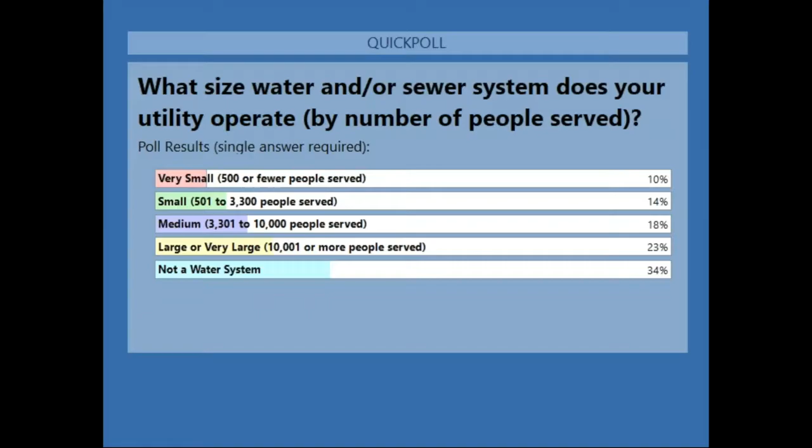James, are you with us? I am with you. My screen should be up. Yeah, looks like we're good to go.

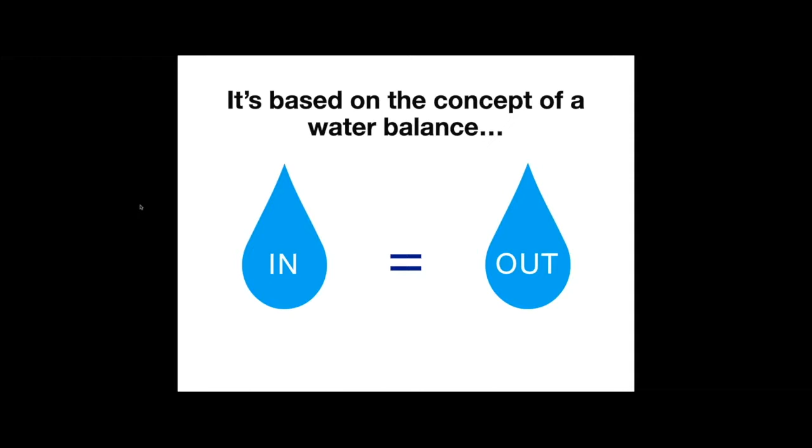And then what the water audit and the software that we use to do that audit help us do is to essentially estimate or calculate the quantities that are going into the system and the quantities that are coming out of the system. And if we subtract the out from the in, that leaves us with a volume of real loss. This is the water that's essentially leaking out of our pipes. This is a slight simplification, but this is basically how it works.

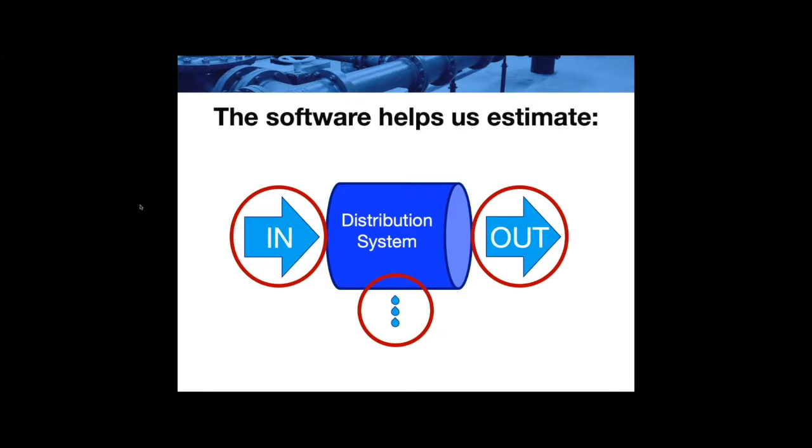And it's really important to recognize that the accuracy of a water audit really depends on the accuracy of the data that goes into it. As with any mathematical model, if you put garbage in, you get garbage out. And one of the quirks of the water audit software is that if you overestimate inputs, those overestimations show up in the audit as real loss. Similarly, if you underestimate inputs, they reduce the real loss number. Sometimes this is really obvious because you end up with a result with negative water loss, which is physically impossible.

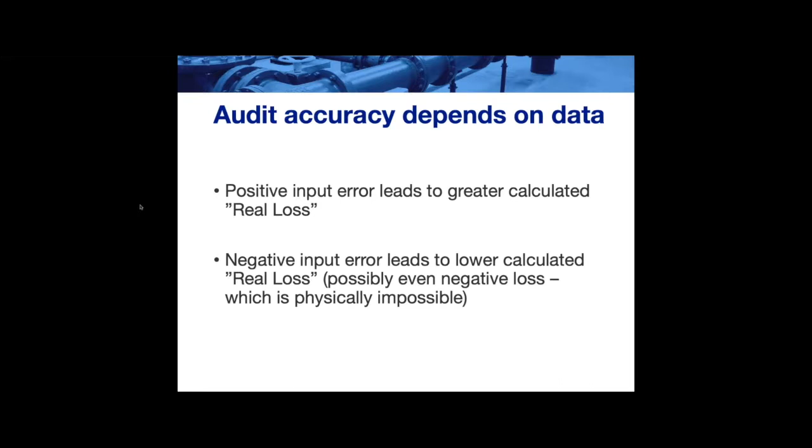But it's important to recognize that this is sort of a top-down set of calculations that then needs to be verified with a bottom-up component analysis, which we'll talk about a little bit later on. It's important when you are looking at your data to realize the water audit has summary data as input. So all of the water that you put into your system, all of the water that you sell to your customers, you really need to review your data and look at the data sources and how those summary numbers are calculated to make sure you know what's actually going into your water audit.

As our old president, Ronnie Reagan, used to say when he was talking about nuclear disarmament, trust but verify. This is basically the way I treat summary data, and I think it's a very good idea. Trust the numbers that you're getting, but make sure you understand where they come from, particularly when you're doing estimated volumes for things that you don't have metered, and make sure you keep good records of how you came up with those values.

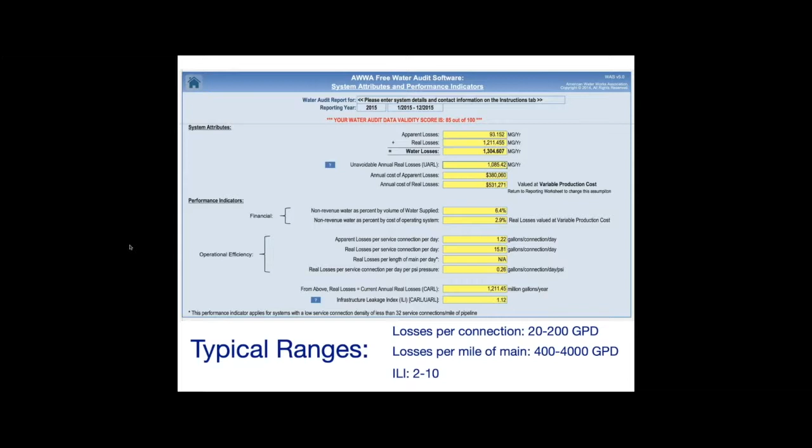It's important when you're doing your water auditing to have a sense of reality about it. And for those of you who are online who are maybe new to water auditing or new to the water world in general, you are never going to have zero water loss. It's just not realistic. All systems leak to some extent, and it's really a question of keeping that leakage to an economically reasonable amount.

If you do end up with a water audit that says you have zero leakage, there's a very good chance that your data is incorrect. But even that is a win because it lets you know that there are points in your data acquisition and collection and storage and analysis that need to be improved.

One of the big things that comes out of the audit is this CARL, your current annual real loss. This is a lump sum value of what's leaking out of your system, essentially. It contains a component of technically unrecoverable losses, and I say that they're unrecoverable because through typical means of finding leaks, these are leaks that will not show up. This is background loss that you can't hear using an acoustic mic, things like that.

There is some amount of loss that you could recover, but it's not really economically efficient to do so. As with most things, there are laws of diminishing returns with regard to reducing water losses, and after a certain point, reducing the loss becomes more expensive than the value of the loss you're getting. And then there's obviously some economically recoverable amount of loss that you can attack. And the audit processes and the processes that you engage after doing an audit help you look at these.

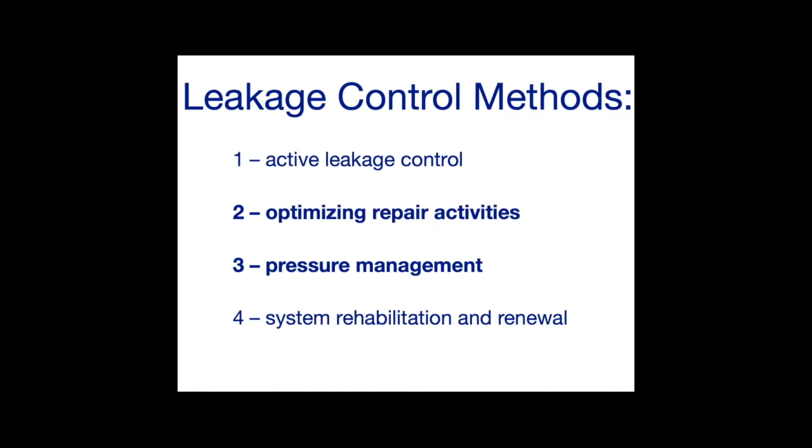But as I said, it's really important to identify what your problem is before you start applying tools. There's no silver bullet. You need to have an ample toolbox of leakage tools and know when to use them and how to use them. As my dad used to say, when all you've got is a hammer, everything looks like nails.

And as a perfect example of this, I know of a system here in New Mexico that had about a decade or so old PVC system, and based on some back of the envelope calculations and anecdotal evidence, thought that they had a leakage problem, and the one tool that they knew about was leak detection. So they spent $10,000 on a leak detection program that didn't really find any significant leaks.

And then they didn't believe the results, and they did it again. That's an example of applying the wrong tool. Their real issue was meter calibration and their data inputs.

So in general, water audits help you identify what's going on in your system. They help you evaluate whether you have a non-revenue problem and whether that problem is due to real water loss, leakage from your system, or apparent loss, essentially water going to customers that you aren't getting paid for but should be, or, as is usually the case, a combination of the two.

It provides us a bunch of metrics and gives us information about costing those. But one of the things that it doesn't really do is categorize those losses. It gives you a lump sum, and it's not going to tell you whether your losses are from breaks, background losses, or tank overflows. That requires further investigation, but the audit is step one.

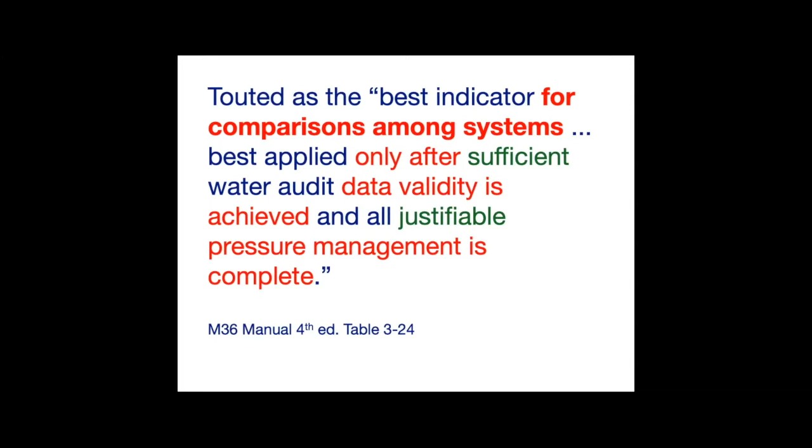And it's a way of sort of benchmarking performance, doing an apples to apples comparison. So, quick review again, ILI, it's your current annual real loss over your unavoidable annual real loss. And I have a little bit of a problem with that name because it implies a level of certainty that I don't think is really there. But it comes out as a dimensionless number because the top one is gallons, the bottom is gallons. And it's calculated using some very basic parameters from the utility.

A lot of folks, when they're talking about this, sort of think of 1 as the magic number, that if you've got an ILI of 1 or close to 1, that you're perfect. An ILI of 1 is not typical. That being said, I've looked at several thousand water audits from around the country, and about 18% of those have ILIs that are actually below 1. Now, a large percentage of those are because of bad data, but some of them are actually legit, which sort of begs the question, if the value I'm calculating is unavoidable loss and my actual current loss is less than that, is that unavoidable annual real loss number accurate? And then we'll dig into that here in a second.

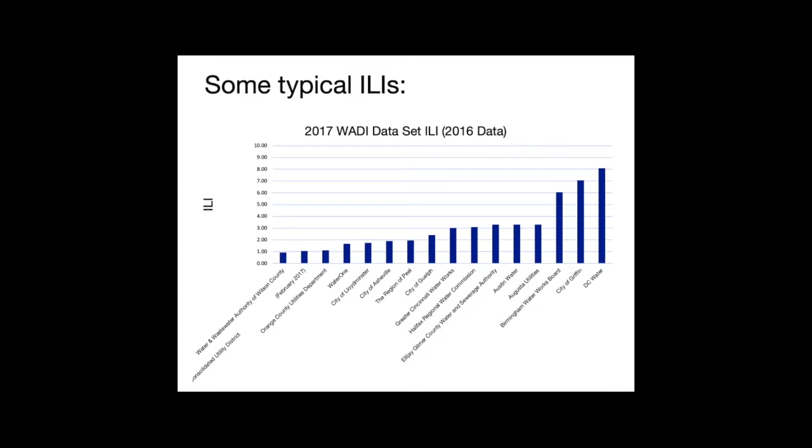Just for reference, a typical range of ILIs, somewhere around 1 to up around 8. These particular utilities are taken from the 2017 WADI data set. This is an AWWA initiative to collect validated water audit data over a number of years. And you can see we've kind of got a wide range here, and these systems are of wide-ranging sizes. So we've got this ratio, but to see whether it is actually applicable, we really kind of need to look under the hood a little bit and understand how these are calculated and where they come from, and some of the uncertainties that are involved with these numbers.

So the CARL, the current annual real loss, that's a figure calculated by your audit based on the values that you give it, all of the inputs, all of the outputs, and then some assumptions about things like theft if you don't have your own records. It's really important to remember that small metering errors can lead to large margins of non-revenue water and show up as real loss or lack thereof. And sometimes it's a little hard to tell how far off you are. And it's important to also recognize that the CARL doesn't categorize your losses. We talked about this at the beginning. It gives you a lump sum. It doesn't tell you whether your problem is background leakage or tank overflows or a combination of the two.

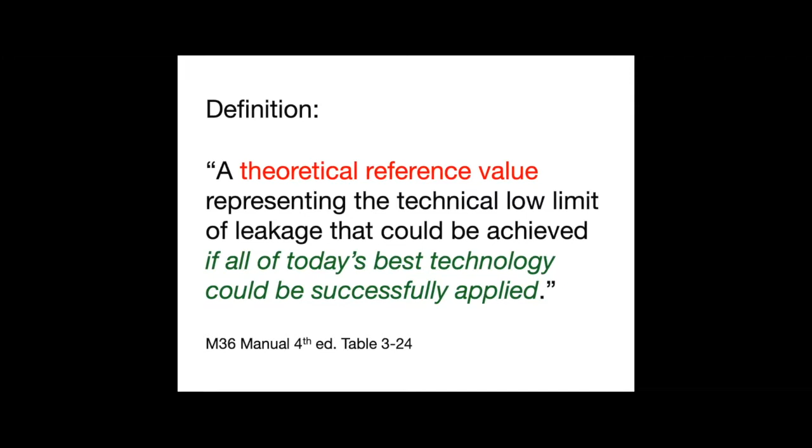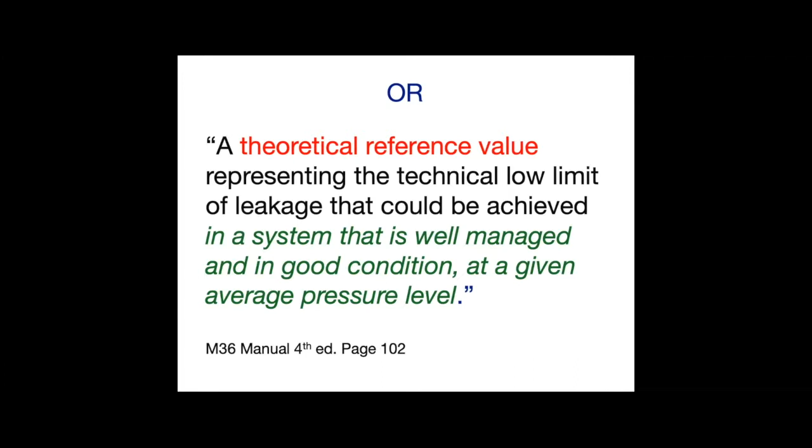The trickier part is the unavoidable annual real loss calculation. One definition is that it's this theoretical reference value representing a technical low limit of leakage that could be achieved if all of today's best technology could be successfully applied. That's a definition in one of the tables in the M36 manual. There's another definition in there that talks about a system that's well managed and in good condition at an average pressure level. These are not exactly the same thing, and they leave some room for interpretation. I'm going to sort of paraphrase, combine the two, and just talk about it as a theoretical low limit of leakage.

It's worth noting that the UARL formula and the ILI are based on an international study that was published in the late 90s. It used data from 24 systems from around the world. I think it was 20 different countries. It's been evaluated and reevaluated and fine-tuned a lot over the last 2 decades. These are performance indicators that are used extensively in Europe as primary performance indicators. A lot of the studies that have been done have actually expanded the size or the range of systems that the UARL is applicable to, generally applying it to smaller and smaller systems, which is where you end up with these systems that have better than 1 infrastructure leakage index numbers. And there's some speculation that that is a result of smaller systems being able to find and address leaks quicker. That being said, they're not without their detractors, and we'll get into some of the reasons for that as we go along.

But the important thing to think about here is that it's a theoretical reference value. It doesn't refer to specific kinds of losses. It's based on tests in district metered areas in the UK in the 90s that have then been cross-checked with extensive testing in Australia, New Zealand, and Germany and Austria. But I don't know if it's as universally applicable as we would like to believe. It doesn't refer to specific kinds of losses, but oddly enough, it's based on specific kinds of losses.

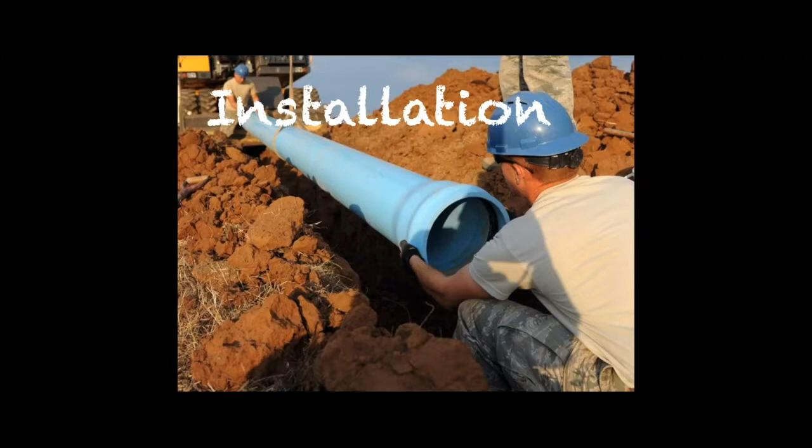The average break frequency in your system, flow rates, time is a big factor. Time both for the discovery of leaks and repairs and the time to do the repairs, et cetera. Of necessity, the UARL and the ILI ignore most of these. If you tried to factor in everything that actually had an impact, you'd end up with an unwieldy formula that was not useful. So this is sort of a necessity, and what the originators did is they looked at things that had a big impact and were verifiable and tried to narrow it down into something that was workable.

And so it uses 4 variables from your system to calculate this value, which is a very small number. It looks at your length of mains, which includes your mains and your hydrant leads. It looks at the number of connections that you have, both active and inactive. It looks at the average length of your service line. This is assuming that your meters are not at the curb stop. If your meters are at the curb stop, this piece drops out. And then the biggest factor in the whole thing is average system pressure.

And this is a place where I think, as a practical matter, there are problems with these calculations, because to calculate these values, you need to have an average system pressure for the year for your system. And I have seen a lot of systems that do not have a solid handle on this number. There's a lot of particularly smaller systems who don't have accurate pressure models. So the biggest factor in the formula often ends up being a little bit of an educated guess, which is why I think you have to be careful about reading too much into the values that come out of these metrics.

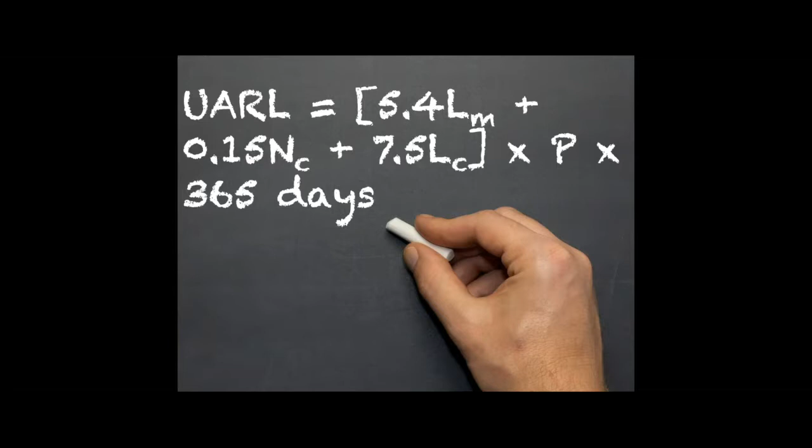This is the formula. So 5.4 times the length of your mains plus 0.15 times the number of connections plus 7.5 times the lengths of your service lines. Add that all up, multiply it times the pressure times 365 days. That gives you a volume. The units are a bit weird, but it does work out to a volume. And so we know what the variables are. Those sort of make sense.

Let's talk about the coefficients. And by that, I mean the 5.4, the 0.15, the 7.5. What are these values based on? And more importantly, what are the assumptions that are going on here? Now, the values are based on research and public studies about mainline breaks, service line breaks, and background leakage.

A lot of this work was done by Allan Lambert. I'll give you some information about him a little bit later, but he's kind of the godfather of water loss and has a really deep background in this and has done a lot of research. And what he and his collaborators did is they basically looked at all of this and came up with a matrix to evaluate background water loss. And it looks at the three main infrastructure components, so your pipelines, service connections main to curb stop, and your service connections curb stop to meter.

As I said before, if your meters are at the curb stop, this bottom line disappears. That's often the case here in the Southwest, but for example, up in the Northwest, the Northeast, where it gets really cold, meters are often in people's houses, so you have to consider that length of service line as well.

And what they did is they came up with sort of ideal rates for background leakage, reported leaks and breaks. So these are breaks that you find in the ordinary course of business, or that your customers report to you that you go fix, and unreported leaks and breaks. And these are those leaks and breaks that you find through active looking, so doing leak detection, doing district metered surveys and things like that, night surveys.

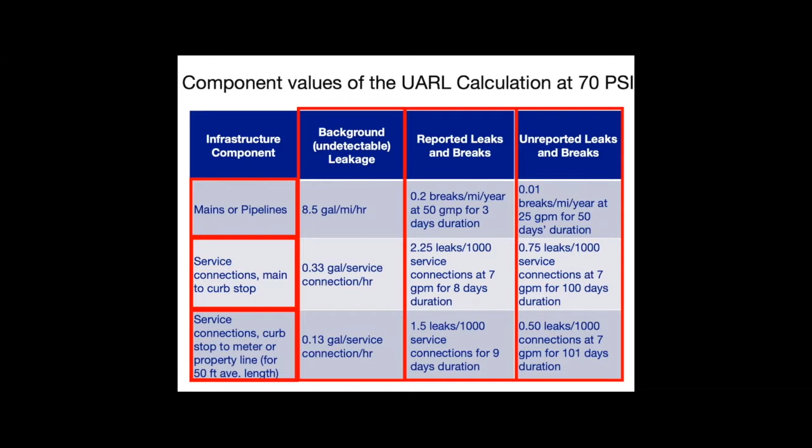So what this points out is the idea that, number one, your background leakage is probably going to be significantly higher than your reported leaks and unreported breaks, particularly when it comes to service connections, and even more so when you're responsible for the actual service line. And the first rate is per mile per year. The bottom two are based on connections. So if you've got a very densely connected system, these service connection loss rates in the UARL calculation can kind of swamp the mains.

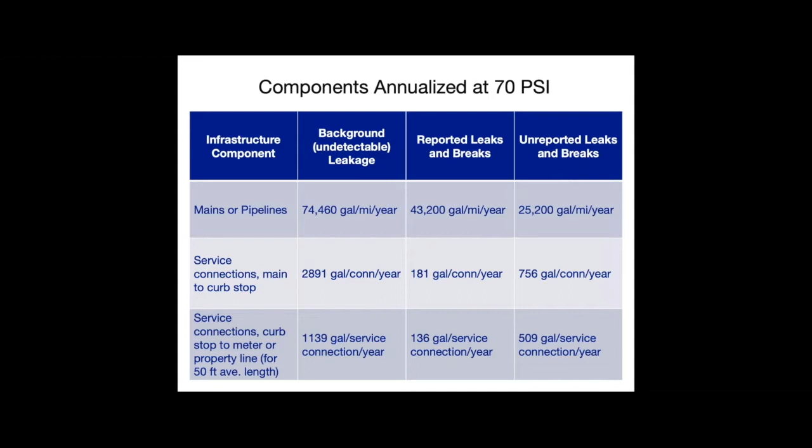So we've got an idea of what's going into this. Let's talk about some of the issues that people have with the UARL. Now, there's a little bit of a disclaimer here. What follows is based on a lot of published articles, our observations at the EFC, and some of my own research. I've been working on this for a couple of years now. I focus on break rate data, and so I've been digging into this for a while.

A lot of folks look at the UARL and the ILI and think they are great metrics. There are a lot of folks that disagree. Me personally, I kind of take them with a grain of salt. My view is a little bit more in the middle. I think they are useful for rough system comparisons, but if and only if you've got solid data to begin with, and the underlying assumptions in the UARL calculations actually somewhat match the reality of the system that you're looking at.

And I think that given the state of water auditing in the United States and data collection, and the fact that there is a lack of uniformity in that, I don't think we can say beyond a reasonable doubt that these are necessarily as valid across the board as many folks would like them to be. And I say beyond a reasonable doubt because in my earlier career I was an attorney, so I have a tendency to look at things in those terms.

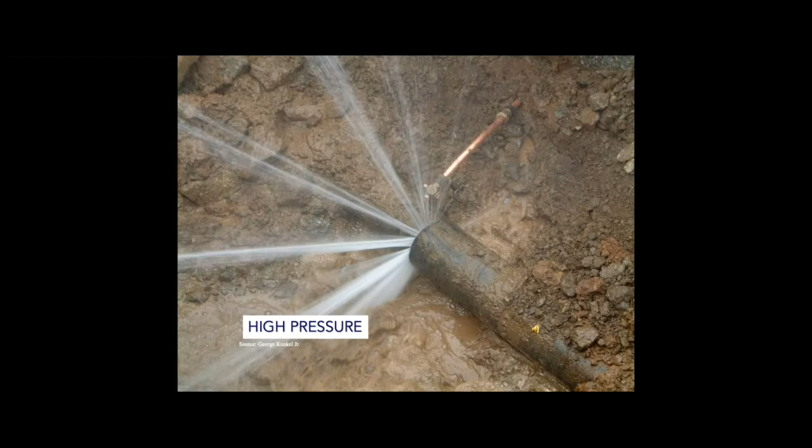So specific issues: pressure, I think, is a bit of a problem or a bit of an oversimplification in the formula. We know that there is a relationship between leakage and pressure. At high pressure, a break leaks a lot. At low pressure, it leaks less, but it's not a linear relationship. There are a lot of studies that show that background leakage typically varies with pressure on a power rule, so it's not linear. What that means is that as pressure goes up, the leakage goes up as well. So you end up with this curve.

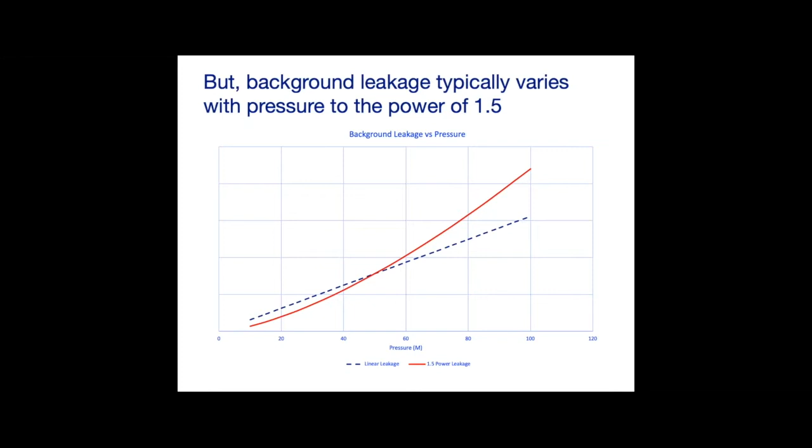Similarly, with leakage related to pipe bursts, that can vary with pressure increases and decreases to anywhere from the power of 0.5 to 1.5 or more. So that dotted line is kind of a linear representation. And how the power rule applies really depends on the kind of break. So fixed area leaks like ring cracks and corrosion holes tend to be on the lower end of the scale, around 0.5, which basically means if you're looking at that in a linear manner, you are underestimating at low pressure and overestimating your UARL at high pressure.

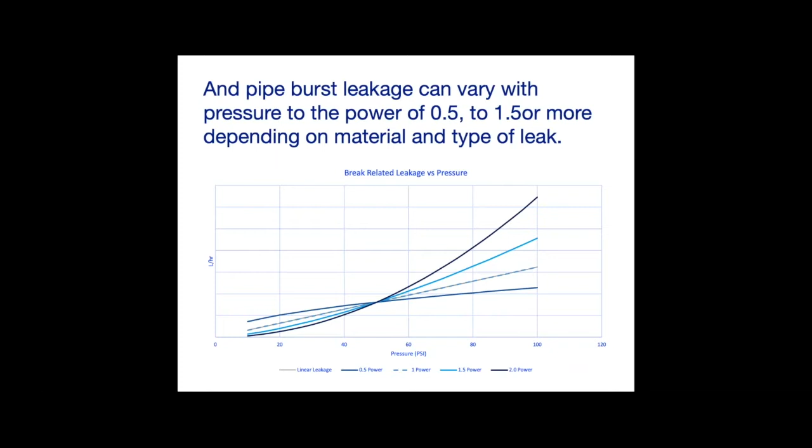And things like splits and flexible pipe tend to be on the higher range of that power scale. Now, obviously, you're not likely to get just one kind of burst in your system, and it's unlikely that all of your bursts are going to follow any one of these particular curves. And I think a lot of the original data was done with metallic pipe, which tends to have fixed area cracks. So what we ended up with is a little bit of a simplification.

The UARL formula treats pressure in a linear fashion. And so the result of this is that you can get overestimates at one end of the pressure scale and underestimates at the other. And as a result of that, a low ILI might actually be the result of an overestimation of your unavoidable background loss.

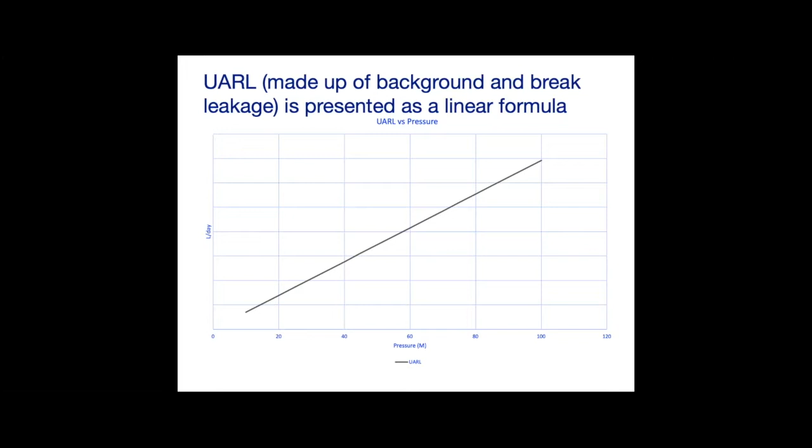So that's one issue. And I want to show you how pressure reduction can actually impact your ILI. You remember one of the first slides we talked about the idea that the ILI should be considered after reasonable pressure reduction has occurred, and here's why. So let's take a hypothetical system with these characteristics. We've got 3,300 miles of pipe, 210,000 connections, and just for ease of calculation, we're going to say the meters are at the curb stop, and you've got an average PSI of 60.

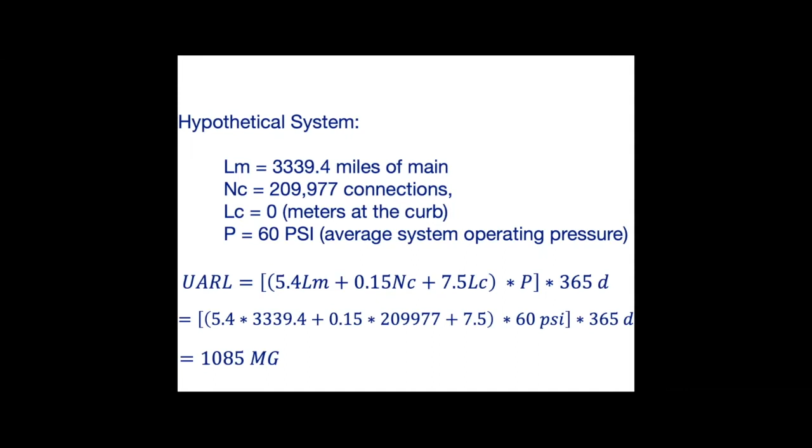If I plug those numbers into our standard formula, I come up with a UARL, sort of an unavoidable annual real loss of 1,085 million gallons. Now, I'm going to take that value and calculate an ILI for this system. Let's assume that the actual real loss in this system is 2,422 million gallons. We throw our formula together and we come out with an ILI of 2.23. So sort of indicating that our current annual real losses are a little over 2 times what should be economically achievable.

So let's assume that we decide we're going to try and reduce our real losses by 15%. And we're going to do that by reducing system pressure by 10 psi because we live in a flat system and 50 psi is good enough. We're going to try and improve our repair response time, and we're going to do some leak detection. And let's say we actually meet that goal. We have a 15% reduction in our real loss.

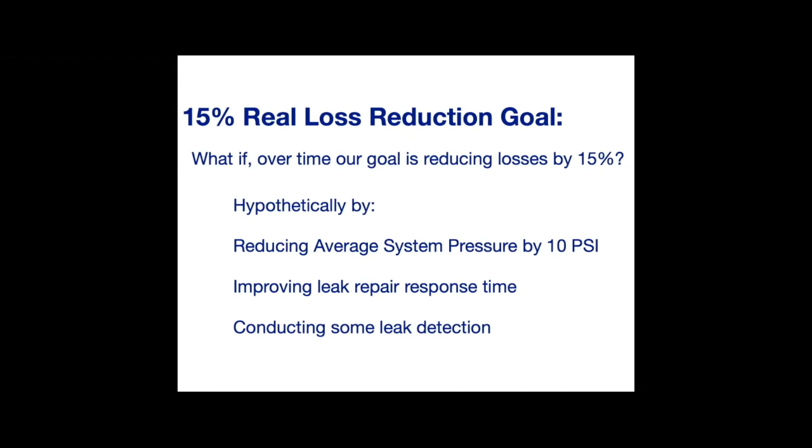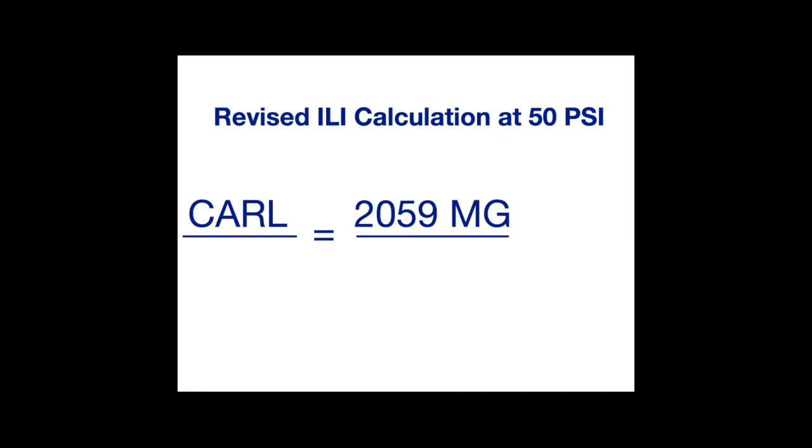So at the end of our year, we do our audit and we recalculate these metrics for ourselves. So our CARL has dropped by 15%. It's now 2059. But because we've reduced pressure, we have to recalculate the UARL. Trust me on the math here. That's 904 million gallons, which gives me an ILI of 2.28, which is actually higher than the one we started with. So if you are only focusing on the ILI as sort of the end-all be-all of your performance, despite the fact that you have had concrete positive reduction and large reduction in your actual real loss, this metric seems to indicate that your performance is worse.

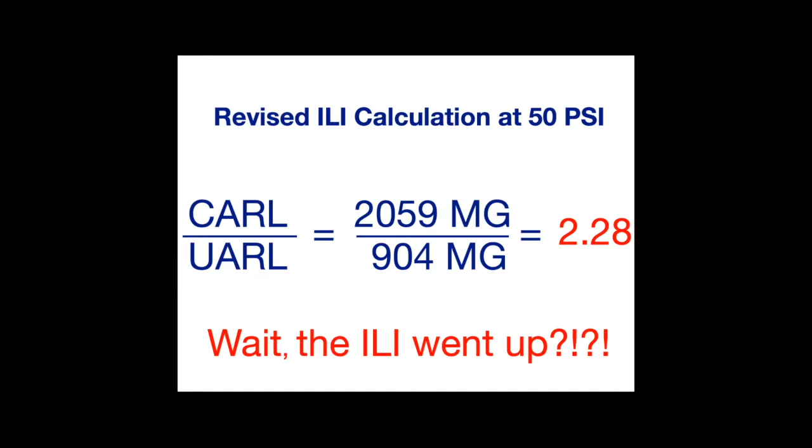And that's an issue, particularly if you focus too much on it. Reducing real losses through pressure management can increase your ILI or may end up with an ILI that's exactly the same that you started with despite these actual real volume reductions. And that's okay because the volume matters more. But a lot of folks like to sort of glom onto a single number as a representation, and unfortunately, in many cases, the ILI is that number that they glom onto as a representation of their system performance, and this demonstrates very clearly, I think, why that's not necessarily a good idea.

Another issue with water auditing in general and the metrics in specific is this idea of data validity and confidence intervals. The metrics are presented as specific values. If you remember earlier on, we had our validated data grade on the top, and then the metrics listed below, and most of those metrics went out to 2 decimal places, which sort of gives you an impression of accuracy. Now, obviously, that data grade up there is sort of a proxy for how accurate your data is, but it's an imperfect proxy. And I have some other issues about how those are calculated, but that's for another webinar.

And it's also important to notice that if you're in Texas, you actually use a different scale. They've got a 1 to 5 scale for each of their data points, not a 1 to 10 scale. They've simplified it a little bit. But the result of this is that you have metrics presented as specific values when in actuality they're more likely a range. But that sort of plus minus range is kind of hidden in the data validity grade.

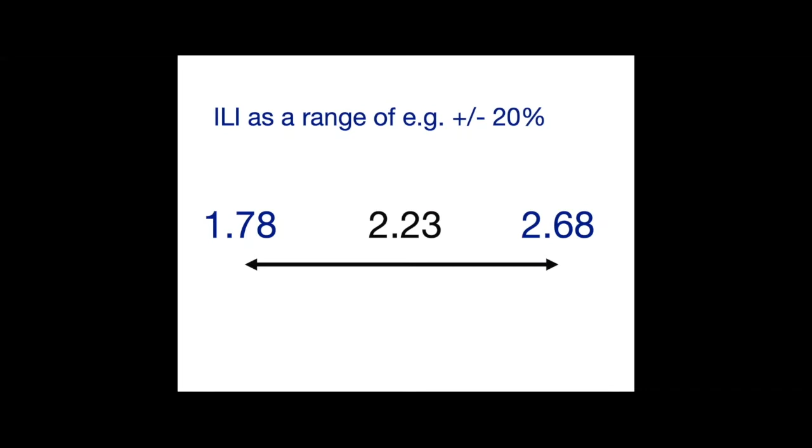So, using our earlier example of 2.23, if just for arbitrary sake we say that our range here is plus or minus 20%, and I'm not saying that this is the actual number you should use, that means you could be somewhere between 1.8 and 2.7. Those look very different, and if you're a board member trying to evaluate your system's performance, I think it's important to realize that there is this range. It's not a hard and fast specific number, and certainly probably not accurate to within 2 decimal points. Fundamentally, if your data isn't good, the metrics aren't reliable.

There's an issue related to break frequency here. There are a lot of assumptions built into the standard formula about break frequency, how fast you're discovering things and how fast you're repairing them. All of those may differ wildly from your actual situation on the ground. For the reported breaks component, it uses 0.2 breaks per mile per year. So does that line up with your system, or is yours maybe a lot lower, like 0.02 breaks per year?

There's 2 recent studies from Utah State, which did surveys of utilities in the US and Canada, and what comes out of that is that, as I think we all expect, there are wildly different break rates for different types of pipe materials. Now granted this is all self-reported data, but if you look at those studies, the break rate that the UARL formula contemplates actually only lines up with cast iron pipe.

Other materials that they look at, different plastics and things like that, actually have lower average break rates, and those are average break rates, not like the low levels. Those are national averages. PVC is around 0.02. That's an order of magnitude difference, and if your break rates and response times are significantly lower than what is being used to calculate the UARL, you are essentially overestimating what you could potentially actually do.